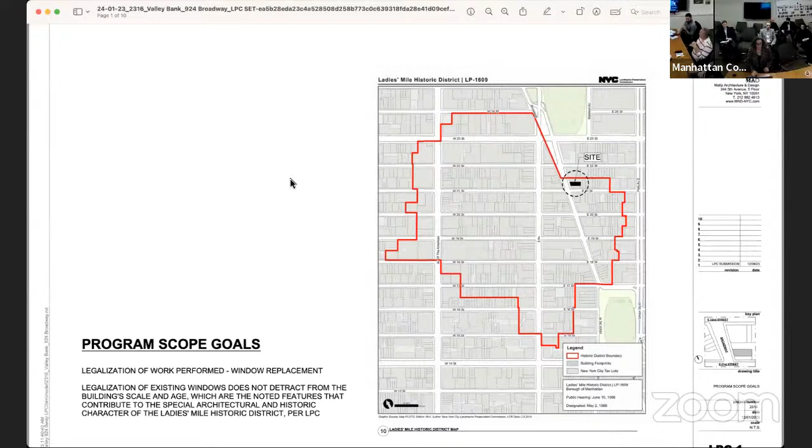Let me change my settings, apologize. Okay, I think that's it.

So my name is Hilda Cohen, I am from Matiz Architecture and Design, and we are presenting the legalization of the existing window replacement at 924 Broadway. 924 Broadway is within the Ladies' Mile Historic District. It's on the very edge, the upper section on the east side of Broadway between 21st and 22nd Street. And the legalization of the existing windows that are currently in place does not detract from the building's scale and age, which are the noted features that contribute to the special architectural and historic character of the Ladies' Mile Historic District per LPC.

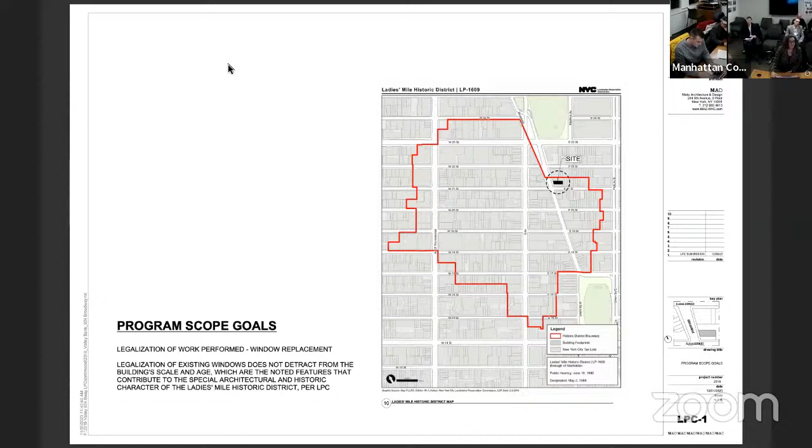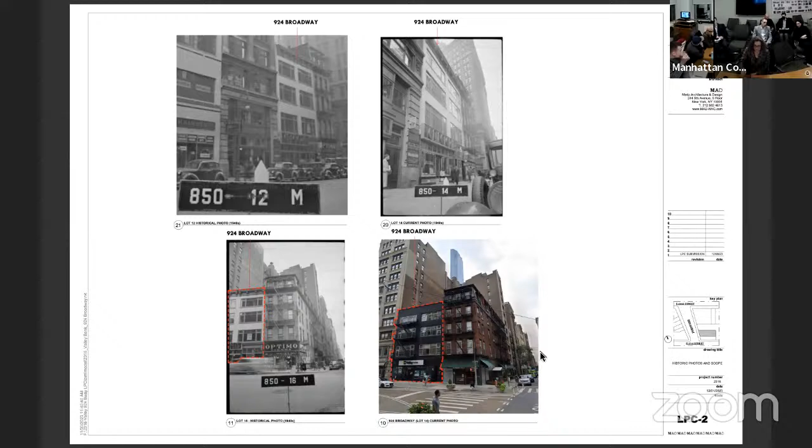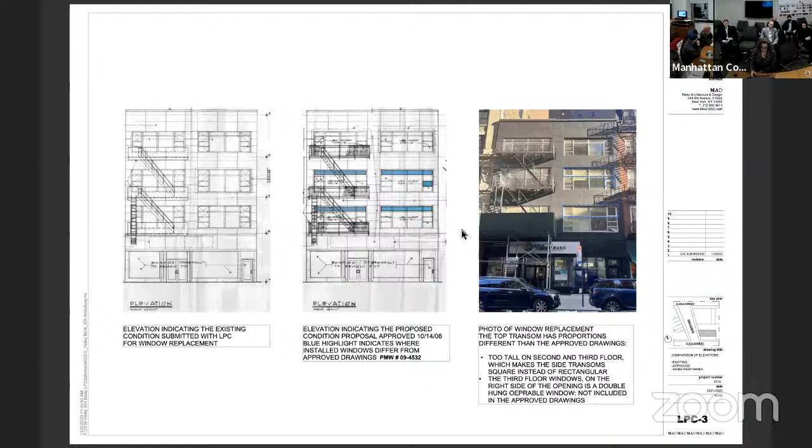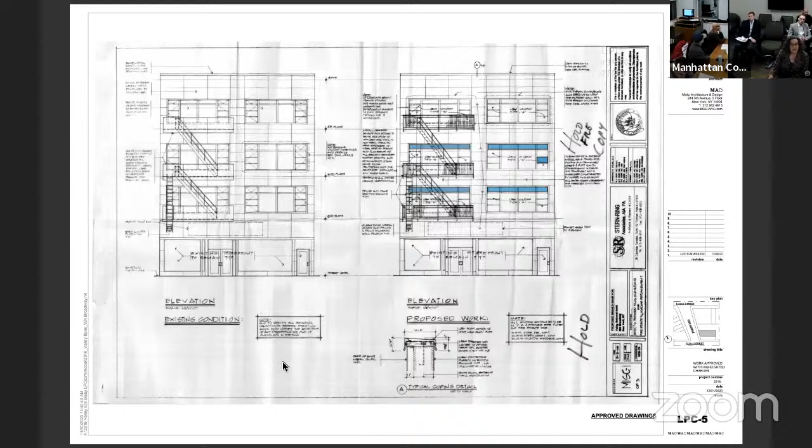One more time, this was from the original drawings that LPC approved. They wanted to see these as part of the presentation. This has not been modified as it was previously.

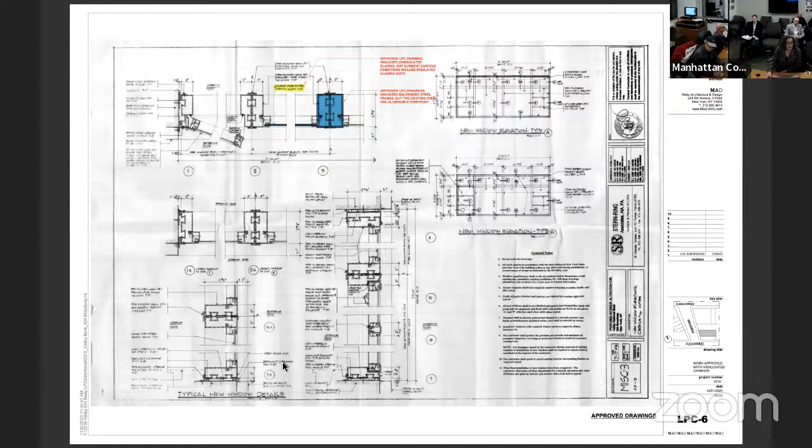This also shows the scope of work that was approved, and it does differ in the sense that what this shows was a single pane galvanized steel frame, which is not what was installed. What was installed is aluminum frame with insulated glazing, and it meets the energy efficient standards of the time that it was installed.

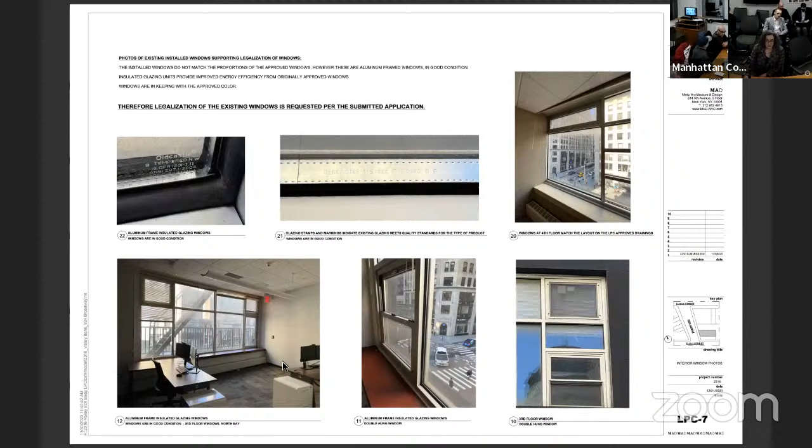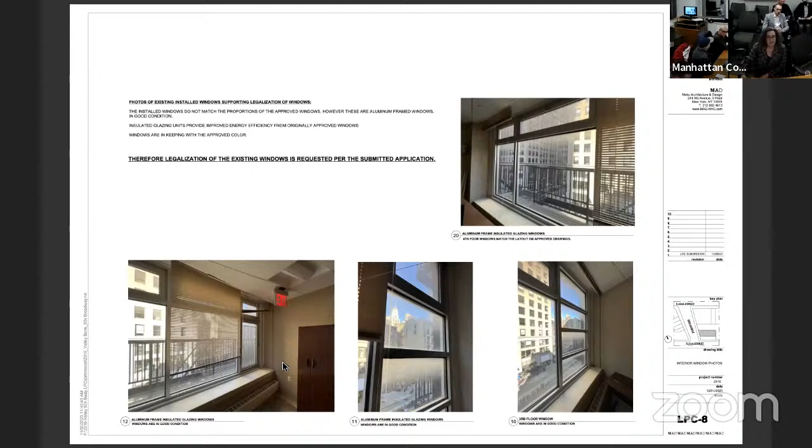And these windows are in good condition, and the proportions are slightly different, and that's what we're trying to legalize. So our request is to have you approve the legalization, and if you have any questions, we're open to that.

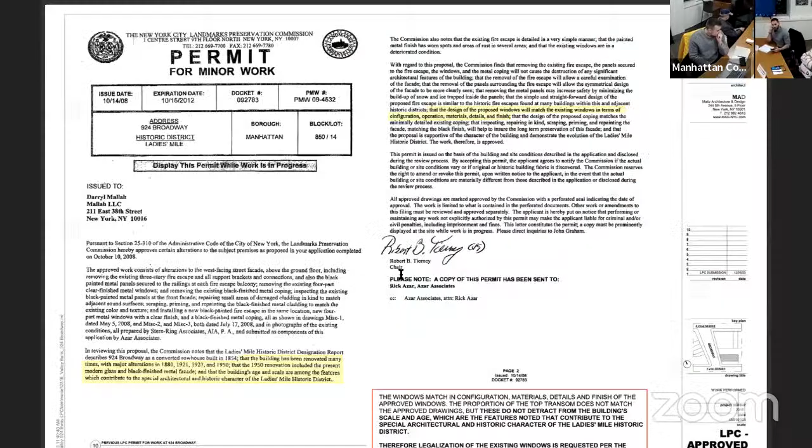Sorry, my computer just... Okay, so the original were actually metal framed. Here it has the removal was of metal framed. So we're assuming it was painted metal or it was aluminum. And then the approved drawings actually had galvanized metal with a single pane, which was one of the reasons that we wanted to make the assessment.

But what actually was installed was aluminum. Okay. And so LPC has said that they don't have an issue with the aluminum windows. They don't have an issue with the material. They don't have an issue with the insulated glazing. It's the specific top transom.

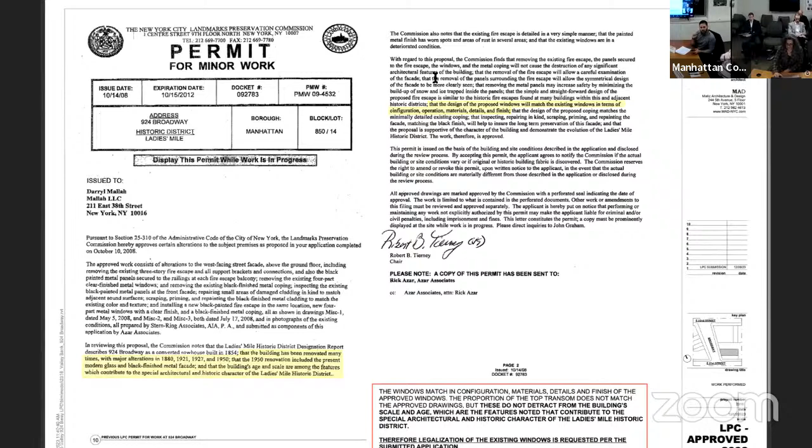Okay, just one quick thing. You mentioned a double hung window, one or maybe more. That's existing currently? That is existing, yeah. Okay, sorry, thank you.

When it was replaced, is there any condition where you have steel and aluminum in contact or near each other, or is it fully aluminum? It's a fully aluminum window system. It was removed and replaced as an entire unit, so the entire masonry opening and window were replaced. Thereby, if the transom wanted to be modified, it would be the entire window that would be modified.

What is the cost difference between galvanized steel and aluminum? I would imagine galvanized steel would be more expensive. By what magnitude, in 2008 numbers? Is it 50% more? 100%? Twice as much? It's pretty expensive, and it's difficult because there aren't as many fabricators that make galvanized steel. I think they must have been trying to meet a metal frame requirement. In discussions with LPC, the actual aluminum frame isn't the problem, it's just the proportions.

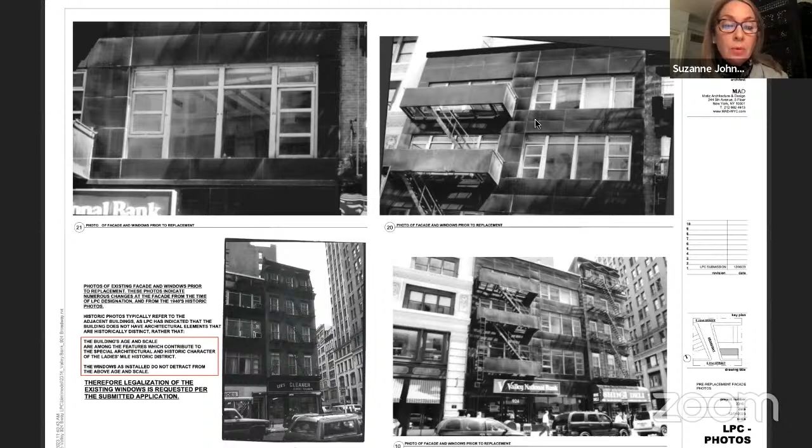Yes, we can. Fantastic. Okay, I just wanted to say I agree with what Tony had to say. I do wish they would do the whole building. I'm not sure if I would say nefarious, but I think this was probably a money issue, but more of it's just setting a precedence. And so I agree with everybody who's spoken so far. Thank you, Suzanne.

Yeah, I guess for me, not having an architectural background, when I look at the plan and I look at what it looks like in reality, it took me a while to figure out what was different. I needed the voiceover to be like, is it that different? It's pretty subtle to an untrained eye. I can see why, what the applicant is saying about the LPC thinking this building is not particularly special for the Ladies Mile Historic District, and that the windows on this particular building maybe aren't that big of a deal. I guess for me, intention is hard to speak to.

I'd probably fall more along the lines of what Brad said, where it's hard for me to say that there may or may not have been poor intent, but for the second one, it looks so similar to the plan to me that I don't have a problem with it.

Thank you, Peter. Coming from the other direction of Sashi, having an architectural background, being an architect, I'm guessing that maybe what happened was the owner of the building put in an application to change the windows, went to a window supplier, said yeah I can do that, here's the price. And then the window supplier maybe said I can save you a few dollars if we do this instead of this, and no one will ever notice. And it happened.

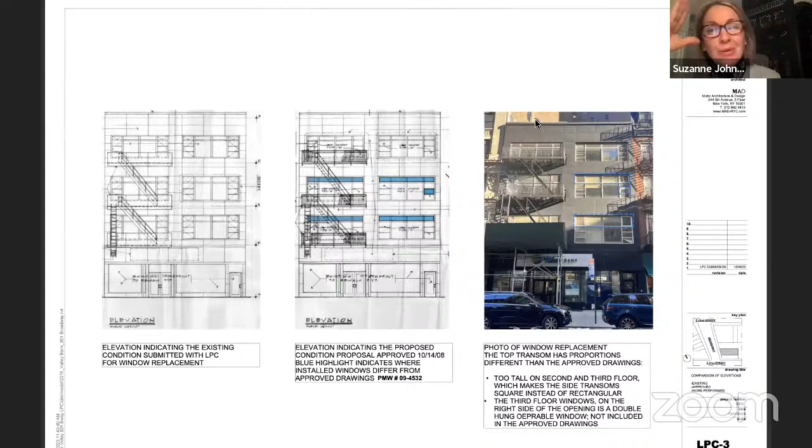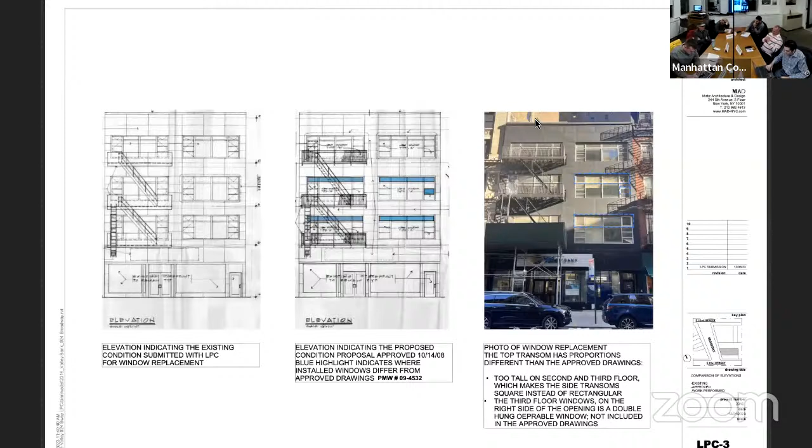Harris, yes. Hirschberg, no. Johnson? No would be the opposite - thank you, no. I'm a little... yes, no, I can hear things if there's a lot of talking. Yeah, no, I think no. Thank you, okay, back - yes. August, come back to me. Okay, Miller? Yes, I guess I'm a no. Ms. Vandorf? No. Stanberg? Yes. Takahashi Rao? Yes. Testa? No. Volkowitz? Yes. And I will be a yes. So motion passes.

Thank you very much, thank you all.

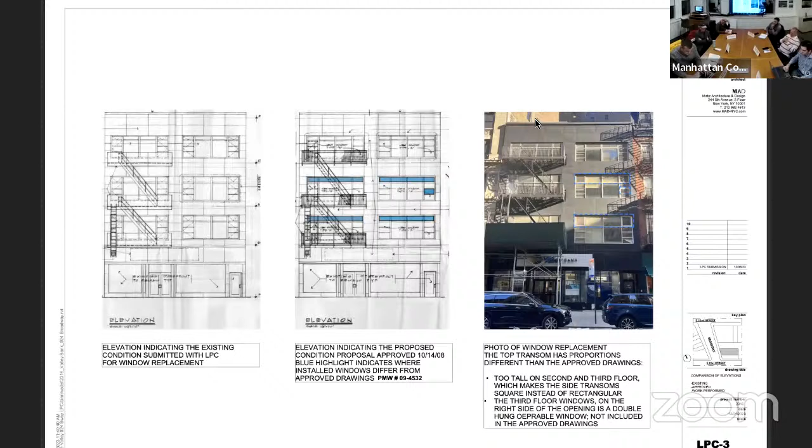Given how close the vote is, I would encourage you to attend the full board, in case this, as I said in my preamble, becomes the official position of the community board. So given how close the vote was and how conflicted I am, I'm not gonna lie, I encourage you to attend the full board meeting, because that may be an item that generates sort of lively discussion.

What we'll do is clarify some of those dates, go through some of the LPC communication that I have. Yes, if you have any further information you can share with us, I think that would be helpful in answering some of the questions the committee had. Great, thank you. It's February 8th. Thank you.

During public comment or - is that the first time that's happened, like a split vote? No, in my 18 years we've had some of that, not so often. But it's rare, very rare. Yeah, I haven't - I've seen it, it is very rare.

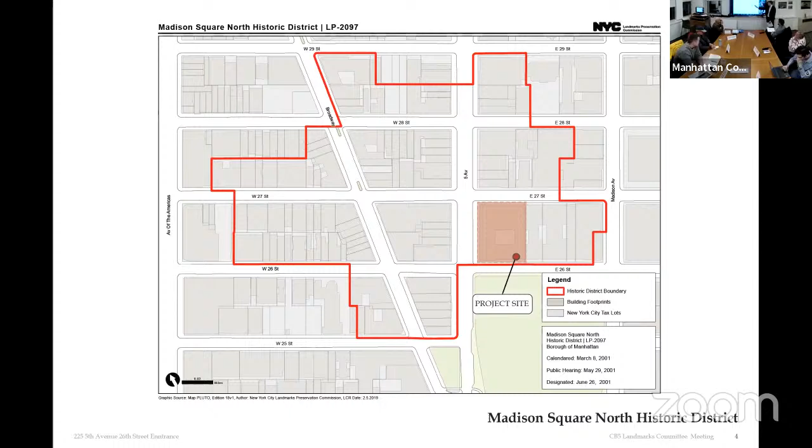And it's commercial in nature and it doesn't really match the use of the building, correct?

So we are proposing to remove the stairs that are on the outside of the building, remove the infill entrance, and remove the handrails that are currently on the building.

So we're pushing the stairs inside of the building. We're putting new doors and a transom in the opening.

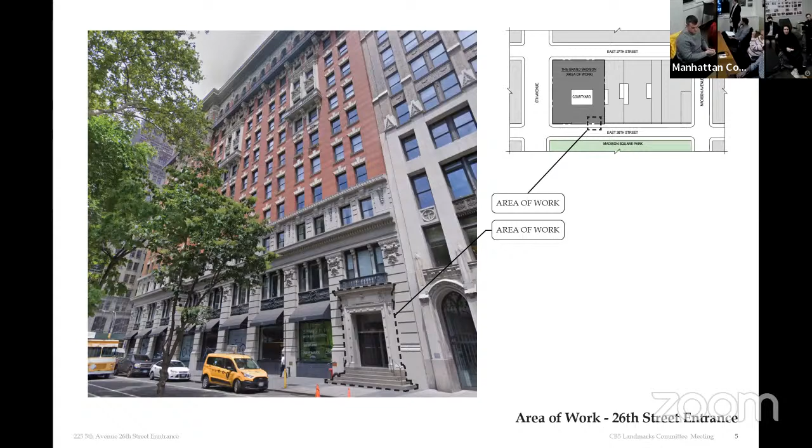Peter - could we look at the Fifth Avenue facade again to see how the sconces are laid out there? And are these original to the building, or were they installed at the time of the conversion? I should be careful with my words, but I know these sconces are not original to the building, but they may have been in an original location. But I don't have that - actually, we have the historic photo.

And do you have - there were different light fixtures, but they were not sconces. Okay, but they were at that location. But do you have a historic photo of 26th Street? The closest we have is this on the bottom. It really doesn't show enough detail - horse and carriages are in the way. Yes.

Was this building once the Brunswick Hotel? Yes, it was the Brunswick. And then it was a gift building? Correct. And then it was converted to condos? Yes.

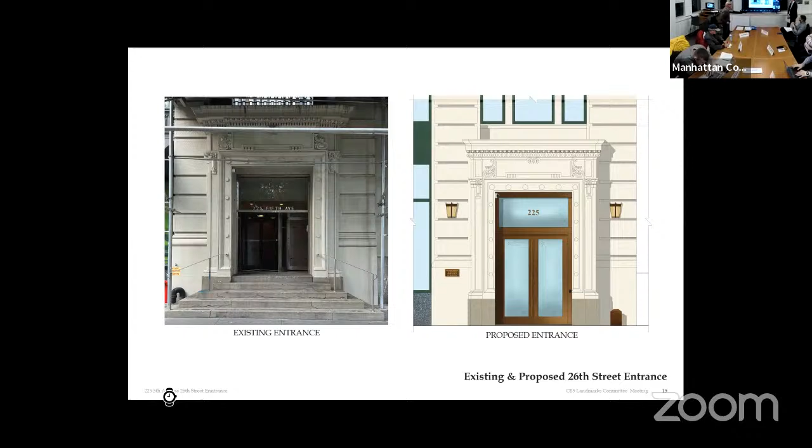Can you address the comment made by my colleague Zool on the intention, or alleged intention, for removal of the steps? I can tell you as an architect, I'm here to make the building look nicer and present well to the residents. Residents don't use this entry for a number of reasons. It's not safe. There is a recess in the building where people can hide. It's not a safe entry and people just do not use the entrance. So for safety concerns, there are a lot of reasons why we're proposing this.

Okay, thank you. So it is a doorman building. Is the doorman located there or at another entrance? No, they're on the other side, the doorman is at the other entrance.

Just so I understand, is the glass going to be frosted? It is not, the lower glass will be clear, and the upper glass will be frosted. Thank you. All right, any other questions?

Okay, so let's open up to members of the public. We still have no attendees on Zoom. Do we have any members of the public in attendance with us tonight who wish to speak to this application? Okay, seeing none, let's move to business session comments.

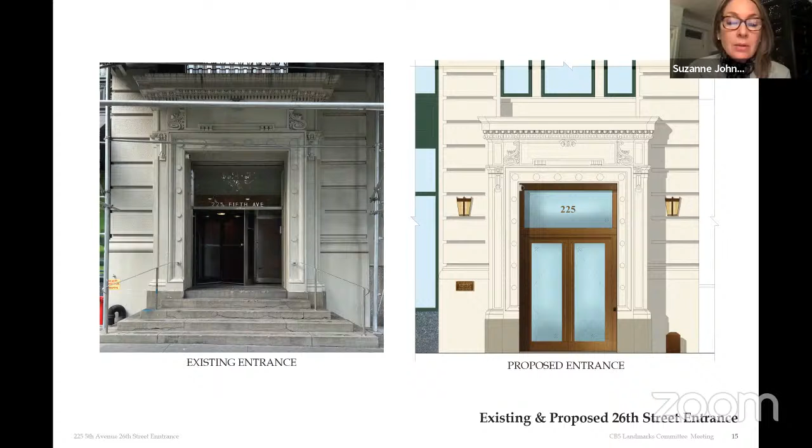So I will make a comment on that—oh sorry, Suzanne, you have your hand up, go ahead. Oh thanks, so I am in agreement with Tony and Brad. I will say very quickly that I agree about the lanterns and about the 225 Fifth Avenue typeface, but barring that, historically, I think it is a nice improvement, and we've certainly approved things in this manner with which we are advocating safety, quality, and landmarks. So I like this proposal. Okay, thank you.

So I'm actually torn with this one. It's always hard for me to approve any removal of original historic features. And although I totally appreciate that the stairs are not the original stairs—they've been rebuilt and reconstructed—nonetheless they built, then reconstructed, to what they used to be. So I really struggle with that.

I think that Zol's point is well taken. I wish the proposed entrance rendering would actually show the sidewalk. I really encourage the applicant to revise this so that at LPC, when you present to the commissioners, you actually show that. I think it will make an actually more compelling case that it is historically appropriate.

In the end, I will support this application, but I really want it known that we don't do it lightly to remove historic features and elements of the building, especially for a building of this significance. This is really the gateway to this particular historic district, and it is a very prominent building in and of itself. Actually, was it landmarked before that—no, we're actually not.

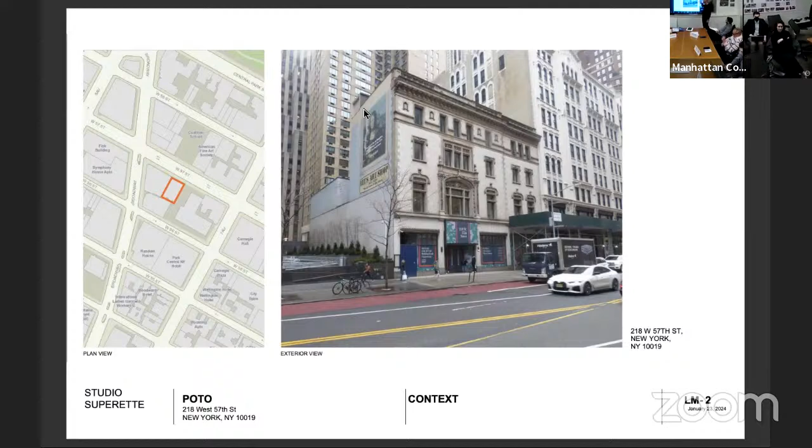Next slide: an overall axonometric, on the left the existing view, on the right the proposed. I'll highlight the areas of work. All the work is shown on this, but there's a certain scope of work that staff is going to approve—rooftop mechanicals, masonry repairs, things like that—noted here.

But the major elements before you and the commission were calendared, by the way, for a February 13th public hearing—I forgot to mention that at the outset. One is increasing the height of the elevator bulkhead by 12 feet to allow access onto this roof.

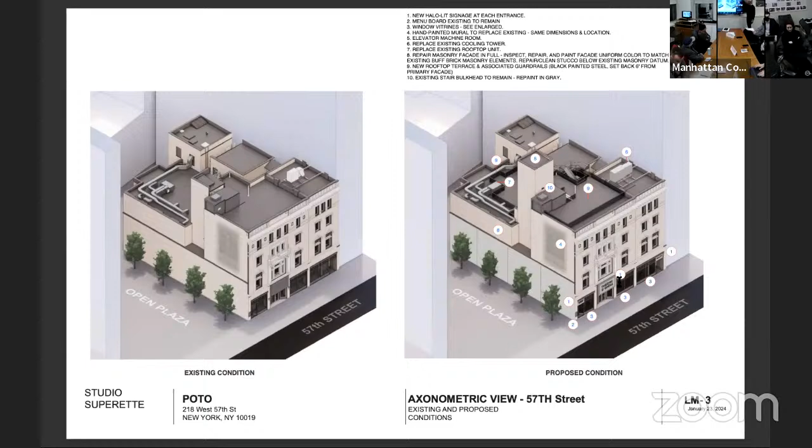We're retaining the existing stair bulkhead. There's a new stair in the back that's not part of the commission review, but basically the elevator bulkhead, the railings on this high roof, the railing on the low roof, reactivating a painted wall sign that exists on the side elevation—that's also part of the scope. And then at the ground plane, introducing new signage and treatments in the storefront windows, which I'll get into in greater detail in just a moment, so you get a sense of the overall scope.

From the front to the side, this building has visibility from 56th Street because that plaza runs through the block from 57th to 56th Street. So that view is actually in this direction, but you can see the elevator overrun here, extending up with access onto the roof. The stairs, the new stair off the back of the high roof down to the low roof, and then miscellaneous mechanical work on both levels that the staff will be reviewing.

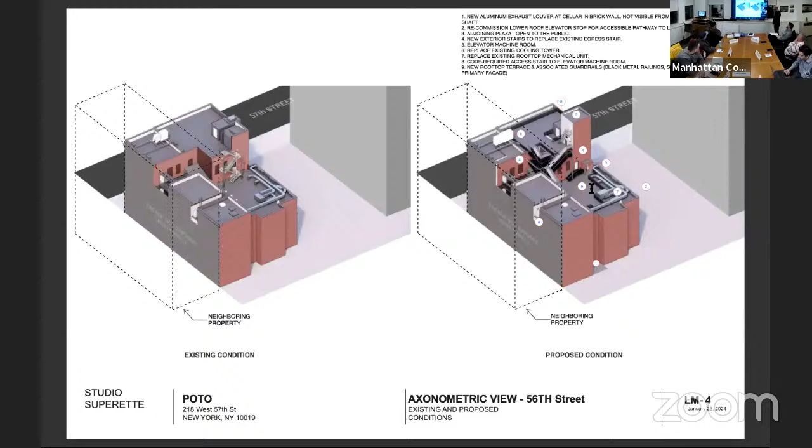The building has a really interesting history of adaptive reuse. It's quite a remarkable range of uses that this building had. It was built originally in its original form, just this 3-bay wide structure, completed in 1897 and designed by Cyrus Eidlitz as a society house for the American Society of Civil Engineers. And it was so popular that they expanded it into this bay about 10 years later.

But by the 1920s, they had actually moved out. And the building was used by the Ajax Rubber Company because this, as you probably all know, was part of Automobile Row. So the Society House moved out and it became a tire showroom, and then after that a car showroom, and then after that it became a Schrafft's.

So the base of the building was redone, obviously for commercial use, and then it was redone again. So the infill, this very grand marquee, was installed when Schrafft's came in. Schrafft's occupied the lower 2 floors, and the designation report actually notes that the upper floors were used for apartments. It's amazing how many different uses this building has taken on.

After Schrafft's moved out, I think in the 1970s, Lee's Art Shop came in. They originally had the lower floors. Eventually they took the whole building, and they made modifications to the ground floor.

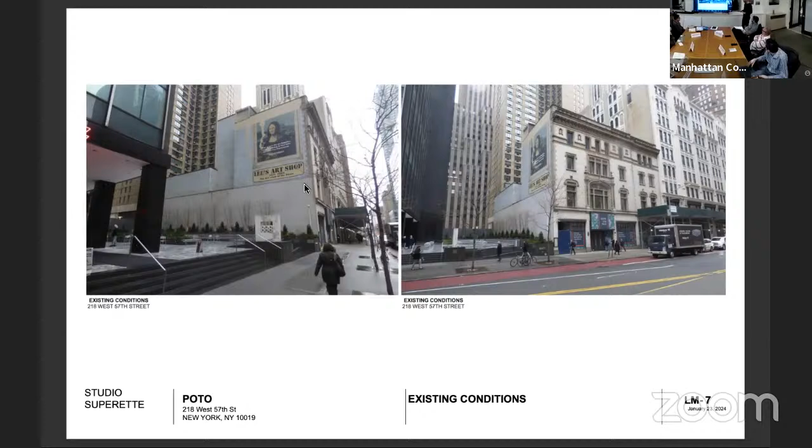We intend to use it for basically associated signage for the production that will happen. It's not going to be advertising. It's exclusively geared toward the production in the building.

This is looking east on 57th Street. And so we're going to be putting a railing in about 6 feet inboard of that, which will peek up over the parapet.

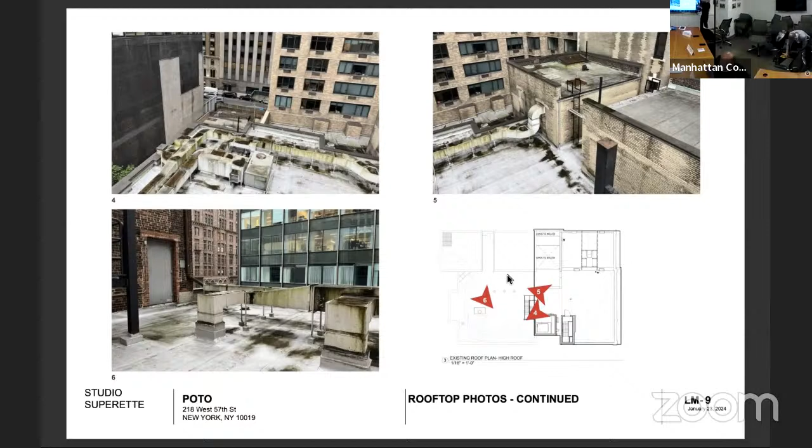This was the extension that was constructed about 10 years after the original construction. The production is going to actually occupy the insides of these, but also there'll be a way for the audience and the actors to occupy this low roof. We'll see more of that in just a minute, but this is this sort of tucked-in space that can be activated for the theatrical use.

An existing elevation on the left and a proposed elevation on the right. So you see the increase in height of the elevator bulkhead here, about 12.5 feet in increase. That bulkhead is set back almost 40 feet from the front of the building, so it is not visible from directly across the street or from the west.

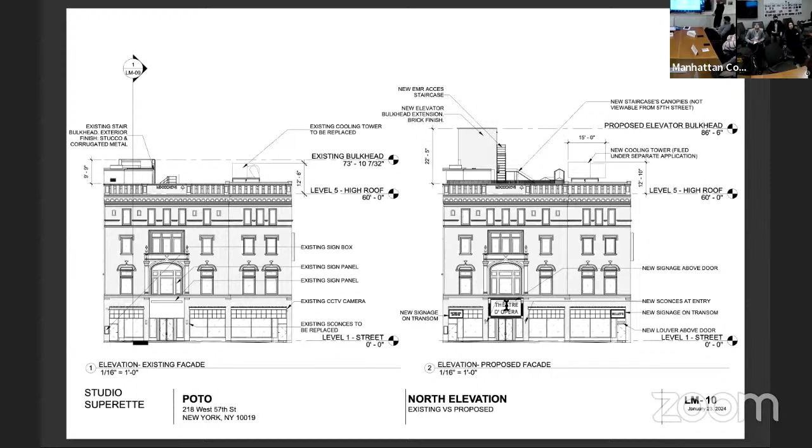We have some parameters and criteria for the wall sign. It will be basically the same size as the existing one. It'll be hand painted, not a vinyl stretch banner. It'll be painted and tied directly to the actual performance itself.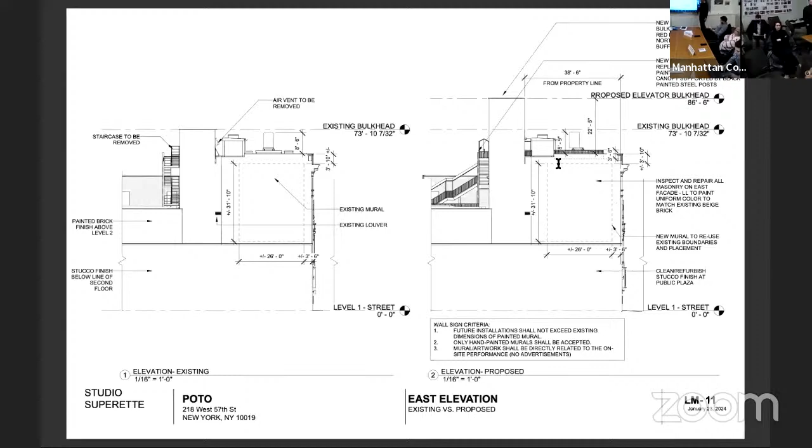And then you can see, inside the elevation, the stair bulkhead and the increased height in the elevator bulkhead. Next slide, a section. There's a little bit of information here, both an existing section and a proposed section. We have to basically extend the existing elevator because it runs through the entire building. It's really not feasible to put in a new elevator.

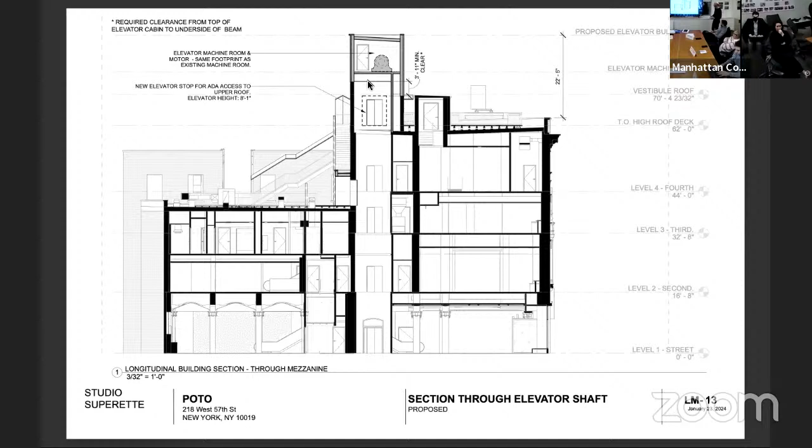So the next slide illustrates how that's going to happen. All the mechanics that operate the elevator have to be lifted up. That's what requires an increased height, and there has to be a nearly four-foot clear space above the cab to the underside where the mechanicals are. That's what results in the twelve and a half foot increase in height of the bulkhead.

A little bit about how the roofscape is going to be used. On this upper roof, during the performances, the actors will be basically in this zone and the audience will be up here, and they'll move through the building to the different parts, including the high roof and the low roof.

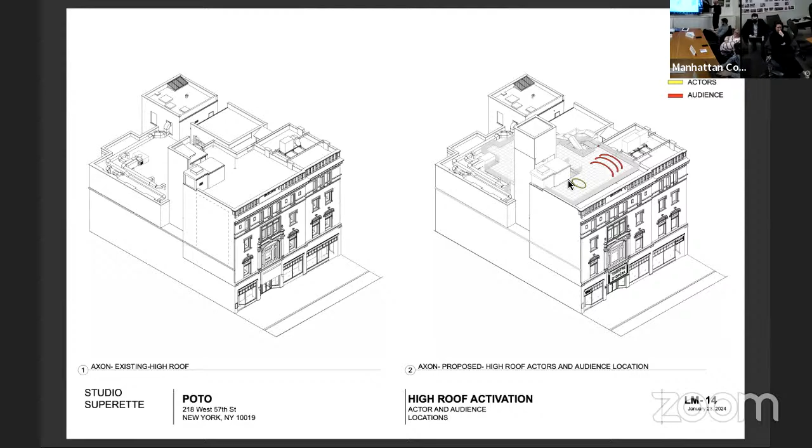Next slide. In plan, there'll be a new roof deck built, with a railing around it. You can see how the circulation will work: here's the elevator letting out into this little vestibule and then out onto the roof, or the stair bringing people right up onto the roof. This stair brings people down off the roof.

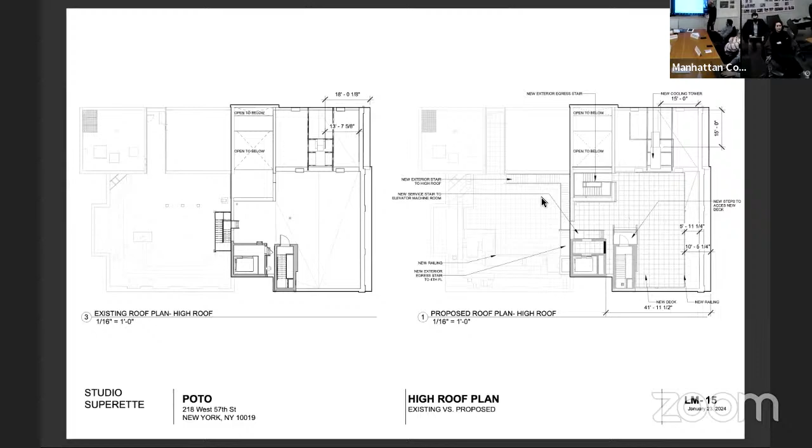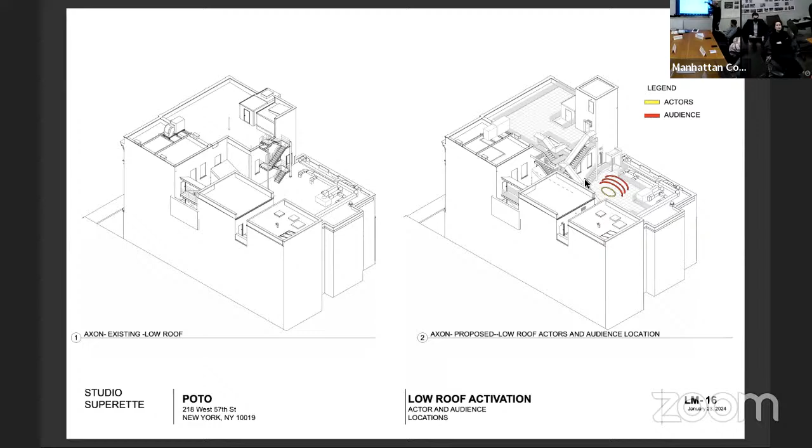Next slide. On the low roof, similarly, tucked into that corner, the actors will be in this zone and the audience will be behind them. There'll be a low railing around here, basically separating the performance space from the mechanical equipment that's up on the roof.

And then an existing and proposed plan, again with new roofing and decking here, mechanicals at the perimeter, railing inboard, and active space there in the corner.

This is going to change probably twenty times before the performance, which I think is scheduled for late this year or next year—following year, March 2025. So this is very preliminary, but you get the idea that it's going to be atmospheric, but low scale and theatrical in its set design.

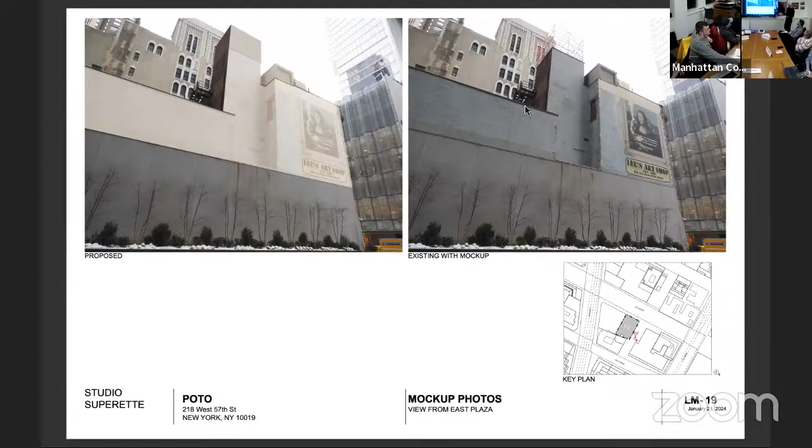Next slide. And then as you come around, walking through that plaza down onto the sidewalk, again it's visible. I think this is not a zero-sum game—like, if it's visible it's bad, if it's not visible it's good. It is visible, but I think what you have to consider is the impact on the building from this visibility.

You never see the extension in conjunction with this really beautiful front facade, this carved limestone. You just see it over this 1970s plaza. I think that's a relevant factor to consider in terms of its appropriateness.

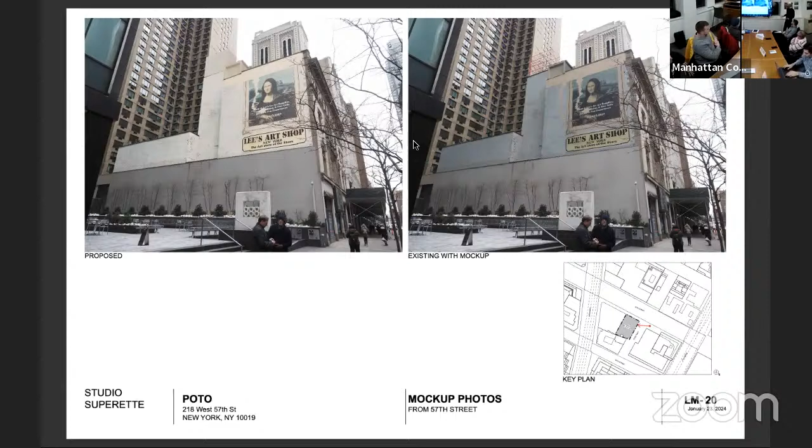As you move down 57th Street, looking southwest, you see it with the Argonaut beyond, but it's in the context of something much larger behind it, and I think it really doesn't detract from the overall meaning of the historic facade.

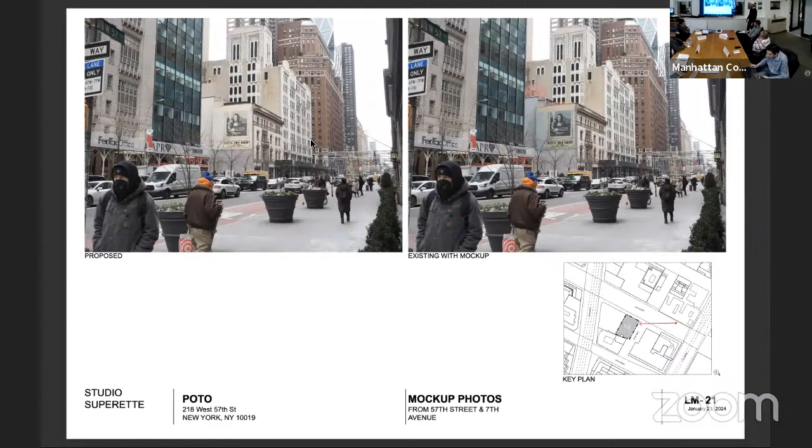The furthest you can get back is from the east side on 7th Avenue, this angled view of the Osborne. You can see the mock-up here and the bulkhead there, a little bit of railing picking up over the parapet. This will just be a simple 4-inch on center metal picket railing.

Coming back around, this is a little bit closer. Again, you can see it sort of through that east elevation.

This next one, sorry, we're on 56th Street now. This plaza runs all the way through from 56th to 57th Street, so this is the 56th Street side. They're doing some construction, I think there may be local law work on this side elevation, so it's closed off right now. But you can see the back of the building.

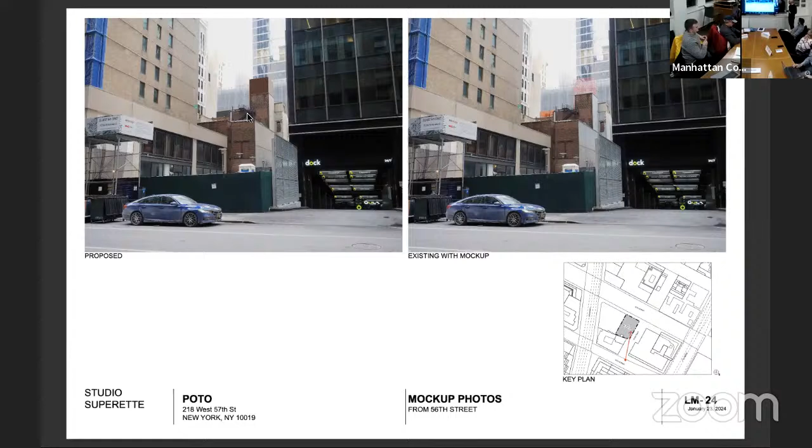This is the red brick of the existing elevator bulkhead, so the idea is that it'll be constructed in red brick, and that brick will continue up. But on the east side, the plaza side, and the north side where it's a different color, it'll be finished in a lighter color to blend with what's directly below it.

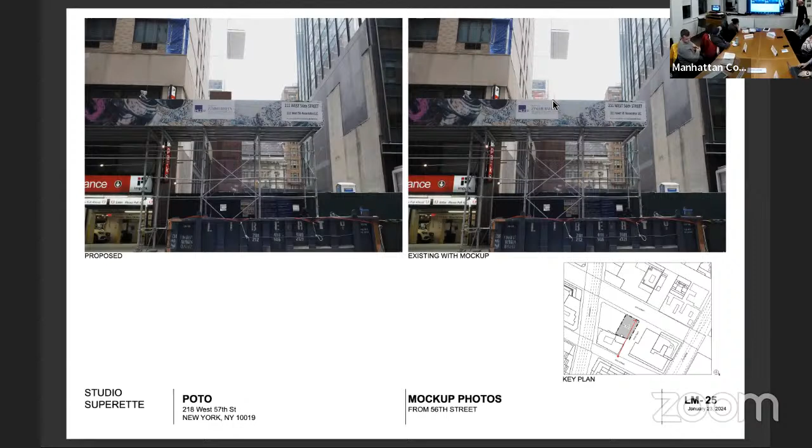We added this, it's a little hard to read, very washed out on the street, but basically there's a moment here where you can see it partially against the sky adjacent to the tower that's over the Art Students League. So there's a vantage point from there.

These images are really just to illustrate where you can't see it. We don't typically include these, but I do think it's relevant that when you're standing directly across from the building, you can't see anything up on the roof.

Or as you move to the west, as far as the west side of Broadway. If you stand at the entrance to Nordstrom, about 10 feet inboard of the property line, you can see a little of the bulkhead, but the way Landmarks guides applicants on this is views from the public way. If you're standing in front of the Nordstrom's entrance, you're not in the public way, you're on Nordstrom's property. Same for the entrance to the apartment building. So there's a little bit of visibility when you're on somebody else's property. You can go into Nordstrom's and the whole front facade is glass, and you probably see a little bit more, but that's not how Landmarks evaluates these things.

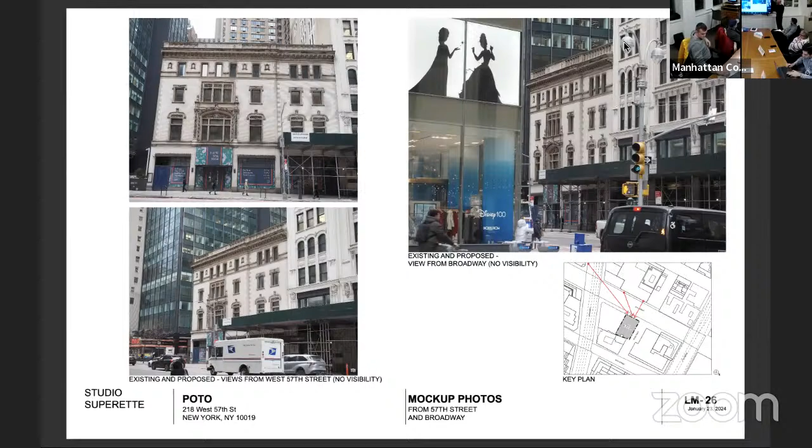Turning to the ground floor, this is an overall view of the base of the building. As I mentioned, all the storefronts, as you saw in those historic photographs, were reconstructed. The base of the building was reconstructed in about 1918. The storefronts that are there today date to 2002, just a metal and glass and granite infill.

This is where the Lee's Art Shop sign is, but there's a panel sign right now over that. And here, these are recessed entries both on the far east and far west sides of the storefront. For the most part, we're going to maintain all the infill as it is, but just introduce signage and improve the lighting and clean things up a bit.

We're proposing 4 or 5 vitrines in the storefront windows with curtains, and you'll see this in the elevation and the renderings of how this will work. The idea is that these little vitrines are going to hold models and little elements related to the production, and they'll change over time.

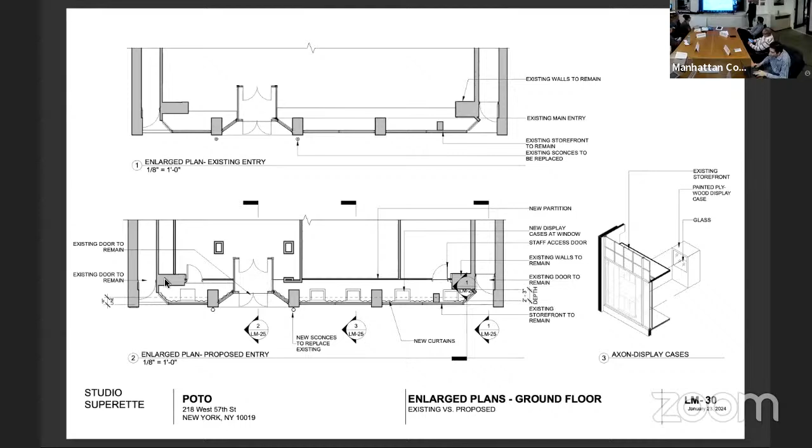The main entry will have this panel sign. This is basically going to be a framed sign with black painted metal. These are going to be halo lit letters, so they'll have halo lighting, with illumination from behind, not face lit.

This is going to sit in front of that existing Lee's Art Shop sign, so that's really right at the main entry. The letters are called out at 18 inches, and we're proposing 2 new sconces in place of the non-historic sconces that are there today.

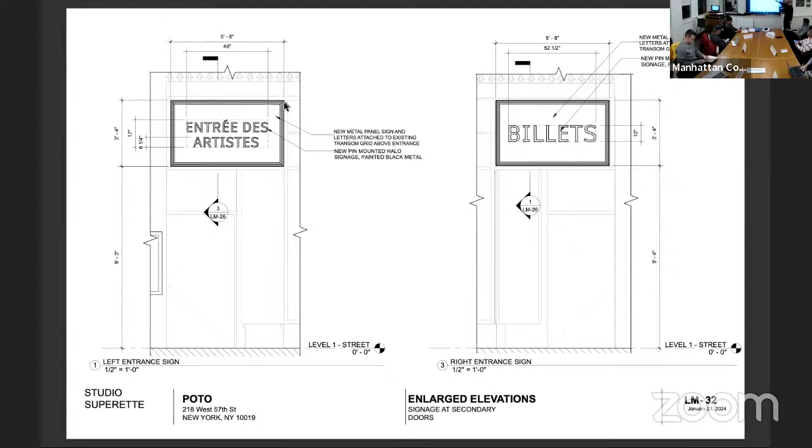Next slide. The 2 outermost bays will also get simple panel signs. Again, these are just a metal panel with 10-inch and 6 1/4 inch halo letters, which will be on the outer bays of the ground floor.

Sections, again, this is just illustrating the vitrines that will be at the storefront windows, and then the signage and the typical storefront windows in section.

Some details on the signage. We can come back to this if you'd like.

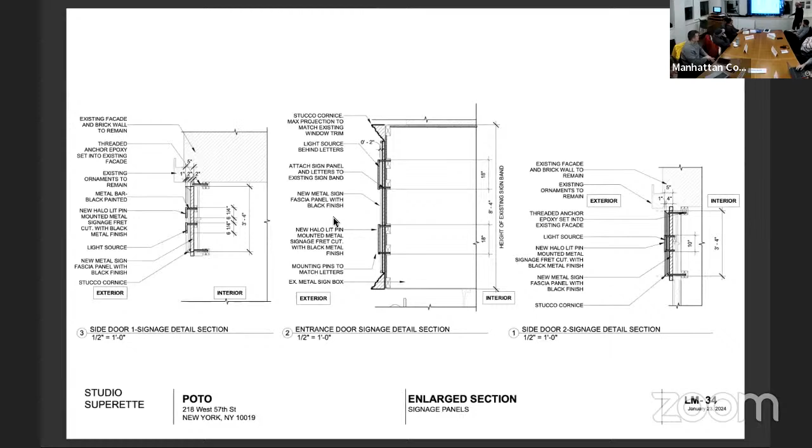So I think one thing, we're excited about the building taking on yet another new use. As I mentioned about the elevator bulkhead, yes, you can see it, but it allows for the full activation of the building, and I don't think it really detracts from the building's architectural character, which I think ultimately is the consideration for appropriateness that we like to think about.

So happy to take any questions that you all may have. Thank you. All right, questions? Brad? I have a few, if that's all right.

Yes. So just to clarify the question, the bulkhead, when you say it's matching the material directly below it? Right, so the finish of it will, this is a little bit lighter, but it probably would have faded out in the dark. So it's going to have the same finish on this east face and the north face of what's directly below it. Yeah, and the south face as well.

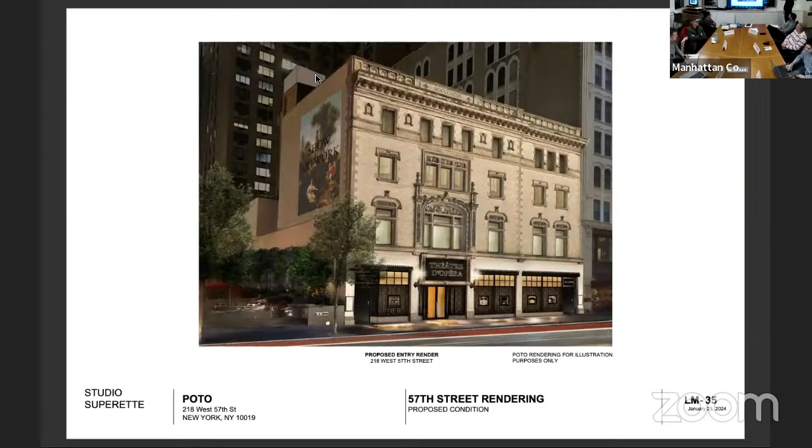Yeah, the railing on the roof. What is the finish and or color of that? Black, it's just a very simple metal railing.

The scenery that you're planning on putting on the roof, I assume that probably doesn't come back to us. That's probably considered in the same category as like furniture.

Right, so the idea is A, that it's low slung and not visible, and B, that it's going to change frequently. Some of it's going to come and go on a daily basis. We've talked together as a team, and the production company understands that if they decide, a year and a half out, that they want something bigger, they're going to have to go back through this process. It's just too early for them to say exactly what they want. So we try to anticipate as much as we can to minimize the number of trips through the process, but that would be unavoidable.

Yeah, but I guess I would be more concerned about the lighting aspect.

Can you talk a little more about the egress from particularly that lower roof? How is that accomplished? If you want to go to the plan. So there's egress through these stairs, which allows people to get up and down from this upper roof. And then there's egress into here off of this roof down to that stair. I think those are our two means, correct? Yeah, that's correct. So the two paths of egress are: one through that mechanical bulkhead, which has an existing stair in it, and the other via a new stair we're building on the east side, going up those stairs and then into the building and down the existing stair that's there. Okay, so both means of egress are interior to the building.

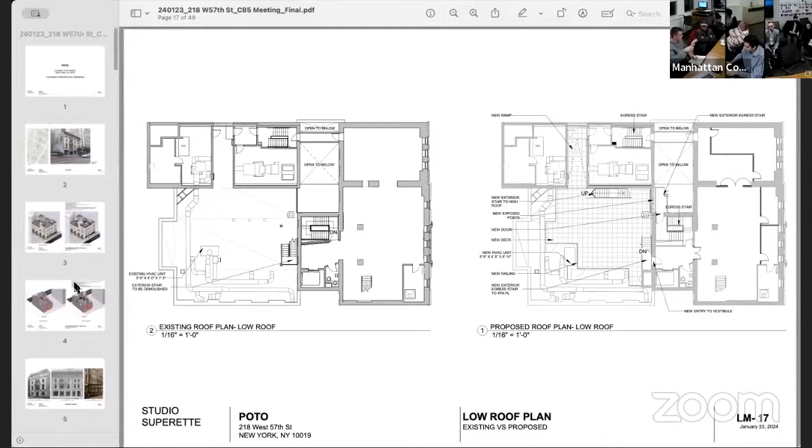And then what other one requires you to go kind of up a little, like half level and then back down? Yeah. So the two new stairs I thought I saw on the roof, are they entirely just communicating stairs between the upper and lower roof? One of the new stairs is a means of egress from the upper roof, and the other stair is a communicating stair between the lower and upper roof.

So the other thing is, those are the stairs, the communicating stairs. I think also this elevator, historically there's an opening there that we are reopening. So there's obviously accessible access to this low roof as well from the same shaft, the existing elevator. Which is not your question, but it's part of the circulation.

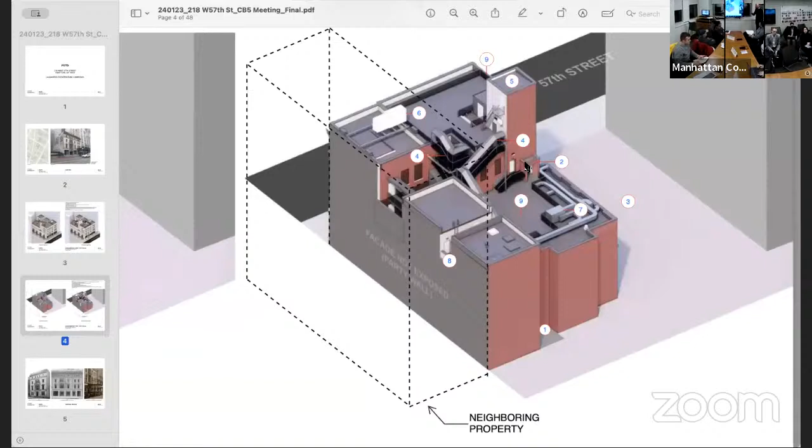Appreciate it, thank you. Moving down to the lower level of the storefront, the vitrines you're mentioning are basically furniture pieces that sit right up against the glass. That's why they're part of our purview. They're not actually penetrating or making any modifications to the storefront; it's the proximity to the glass that requires commission review.

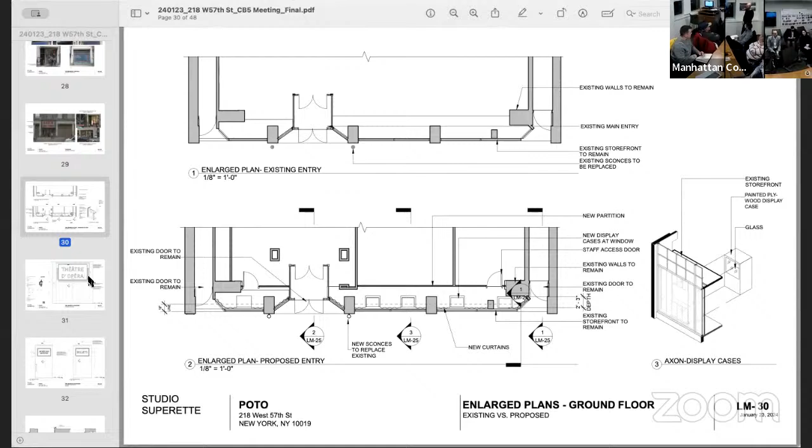Okay, and then the signage and lighting you're proposing, particularly the new signage and new lighting. Is that penetrating historic fabric? No, this sign is basically going to sit in front of where the Lee's Art Shop sign was, and the other signs are just going to be attached to that sort of muntin grid from the 2002 storefront in the building.

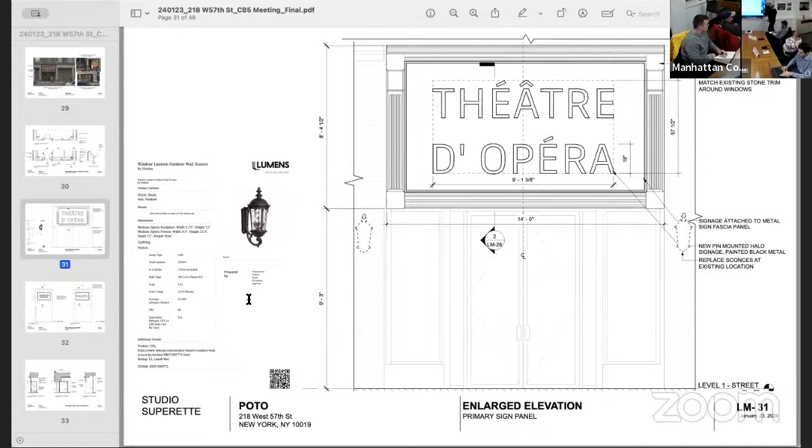Okay, and then the lighting? So the lighting, maybe we can go back to slide 28 or the one before it. The lighting is basically going to go in place of these existing fixtures, which are strangely undersized and I don't even know if they still work, so they'll go in that location.

Thank you, I actually have a follow-up to Brad's questions. How are these fixtures going to be attached? Through the masonry. And are you going to try to reuse the existing punctures from the existing fixtures? I think the elevation would allow for that. I don't know if you guys know, is it the same location for the sconces? Yeah, same location. But what about the attachments? Are you basically going to remove and then have the same holes — four holes that you're going to patch, and then make an additional four holes for the new fixture? That would be the plan. There was an escutcheon plate on the back of the fixture, so we haven't pulled it off to see where the actual penetrations are, but there is an escutcheon plate behind the fixture and we would keep the same footprint of that escutcheon plate on the lines.

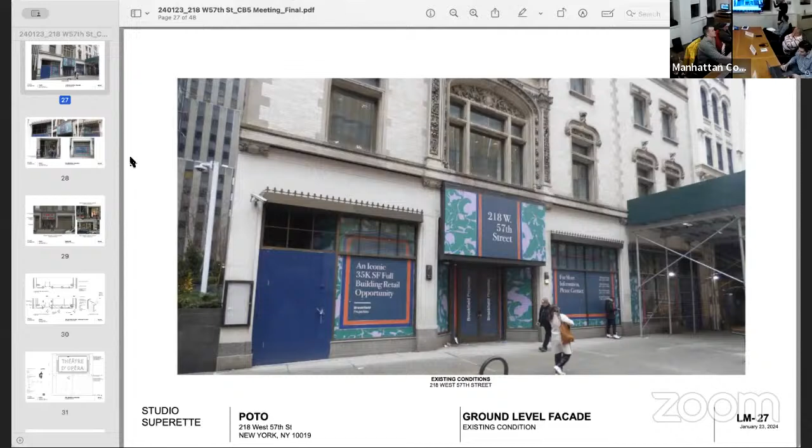Okay, the other thing I'll point out — if you can go to slide 27 — the base of this building is all painted, and you can sort of pick out a little bit. This is not beautiful pristine stone; it's been coated and smeared and painted. So it's not exposed masonry that's in great shape, and it will remain painted just because of the condition it's in. So what is the material, is it limestone? I think it's a combination of limestone and stucco because the base has been changed so many times that there are little bits and pieces you can read through the paint. It's not a clean stone edge, so it's been sort of worked over. Oh yeah, I see, okay, got it.

I have more questions, but I'll get back to them later. Suzanne, you have your hand up, go ahead.

So, wow, that's a lot of changes to a historic building that's a real gem in this neighborhood. I think it does matter. You mentioned it's just the impact on the building, but this is next to the Rodin building, the Osborne, Carnegie Hall, the Argonaut building. So I think it actually does matter to the neighborhood.

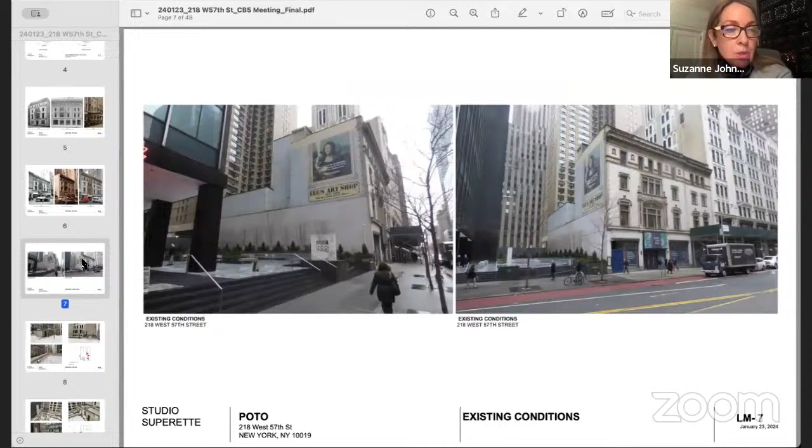Can I just ask you first about the public plaza that you're going to be building on this addition? Can you just verify for me, that was a public plaza, it used to be an open public space. Is that something you guys can build on, I guess? Now I'm talking behind where you're adding this addition.

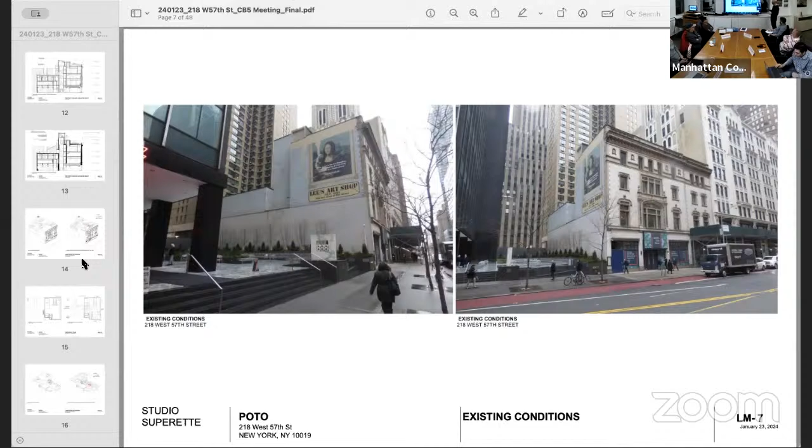Yeah, I think you maybe misunderstood our proposal. We are not touching the plaza. The only work is up on the roof and then at the base of the building. So you're not adding an addition to the back of this building? No, there's no addition. All we're doing at the roof is extending the elevator and extruding the existing elevator shaft.

Let's make sure everybody understands the scope of work. I'm sorry that I'm confused, it was just a lot of information. So if you'll bear with my question.

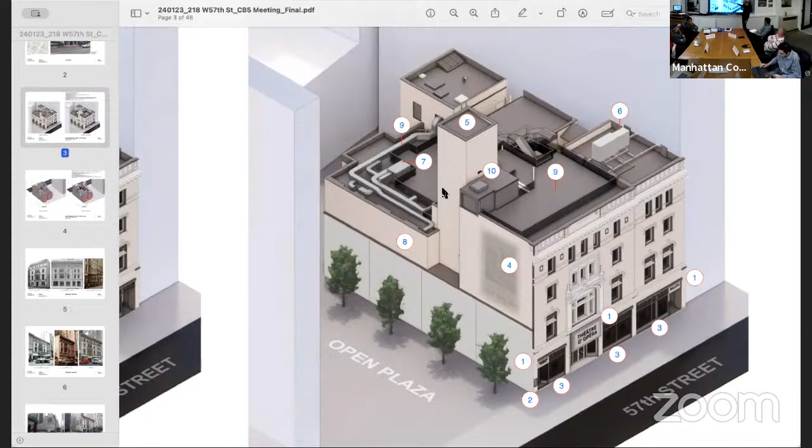Yeah, sure. So there's replacement of mechanical equipment on the roof. There's extruding the existing elevator shaft, basically one stop more to allow people to get onto this upper roof. We're putting a railing on the roof because right now the roof, particularly this edge, is not code compliant. So we're adding a railing here and also at the lower roof, and then the connecting stair. That's the scope on the roof.

Okay, so that squared off area there, that's not in the public—you were speaking about the street behind it, you were talking about a view from the street behind. So I guess I was a little confused as to where that was being placed.

Can I just ask you about the railing? So you said it's not compliant because I don't think they've ever done anything on the roof before. And I'm a huge Punchdrunk fan, and I love the McKittrick and Sleep No More.

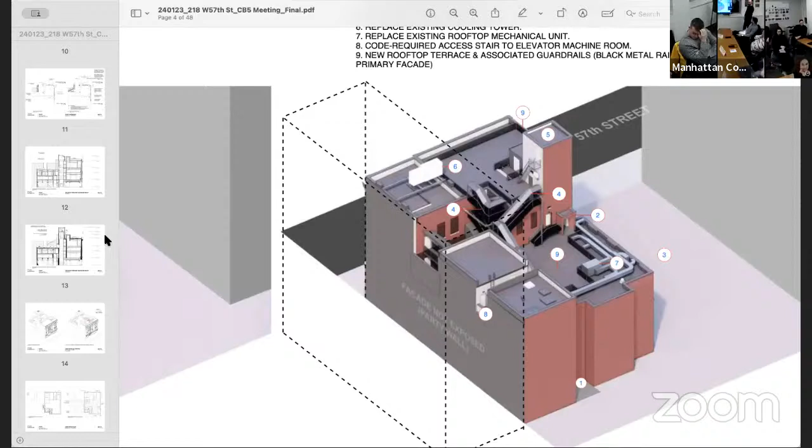How long is this contract in place for? Is it all these changes being made to this historic building, and how long is the contract for this particular show in place? Do you guys know? I don't know how long the lease is, but they intend to be there for a long time, though I'm not sure that's relevant to the appropriateness of the scope of work. Yeah, I just wondered, because it's a lot of changes—if it was a 6 month run, it would be a lot.

I just wanted to ask about the red brick. Can you speak a little bit more about that change—were you saying that you were building that in the red brick color that would match the facade? Can you talk a little bit about that?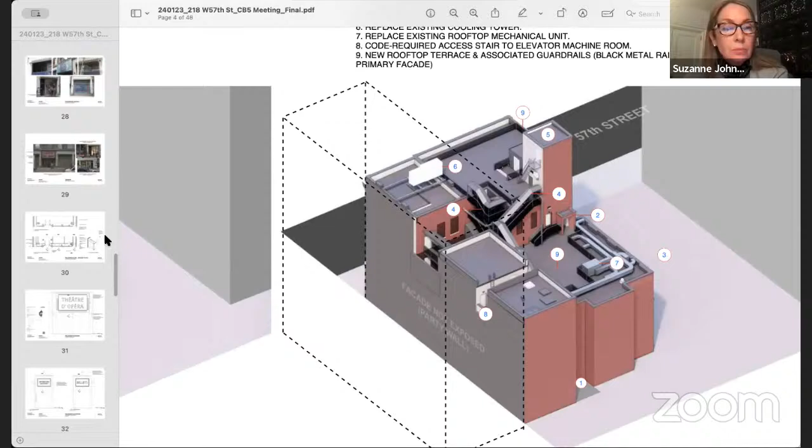Yeah, if you can go down to the existing photo from the back, the sight lines. So right now, this is the view from 56th Street, the back of that connecting plaza, that public plaza, where we are doing no work. The whole back of the building, all the secondary elevations, are constructed in red brick. The side elevation has been painted and parged. So the idea is that the extension will be built in red brick to match what's directly below.

So this will hopefully be more continuous in its appearance, with red brick above connecting with the red brick below. And then on the plaza elevation, it'll be finished in the same color as that side stucco wall.

Okay, and then just one last point with the arrow so that—because Suzanne is watching. Right. Yeah.

Can you go back to the previous slide and just highlight that? I don't know if Suzanne, are you able to see the arrow so that you can see what has changed?

I can. Okay, good, thank you. I couldn't before, and I live in this neighborhood, I walk by this all the time, so I'm sort of familiar now. I'll take a closer look, but I understand now.

Before it wasn't clear to me, but thank you. Can you see that railing, the one you're adding so the actors don't fall off? I work as an actor, no actor wants to fall to their death. So the railing's important, but will you be able to see it from the Osborne or from some of these residential buildings across the way, from an upper floor apartment?

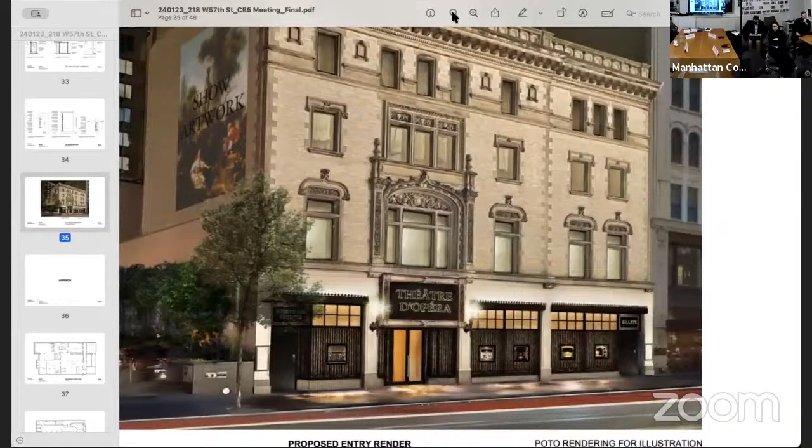Great, thank you. Other questions? Yes, Barbara. Can we look at the facade picture rendering with the vitrines? I just wanted to ask about that. I also pass this building every day on my way to work, so I'm thrilled it's going to be used again, it's a really special facade. I wanted to get a feel for how animated that facade will be to passersby. Is there any thought to making the vitrines larger?

I think the idea is that they're going to have small models which they will change out. So they'll be animated, but they won't be large scale, they'll be lit and animated, but not large.

Okay, can you give the explanation again, I may have been distracted. For the treatment at the, what is this black finish? There's no change to the finish, it's really just how the rendering is done, it's just dark. There's no change to the finish of the storefronts.

Basically, we're putting in curtains in the windows with a vitrine at the center. Got it, yeah. So the material is glass, the window, absolutely, and all this is happening on the inside. Nothing inside outside, there's the black curtains. Which, technically, Landmarks doesn't regulate window treatment, so that's not really part of it, but it's part of the way the windows are being treated, with the screen and.

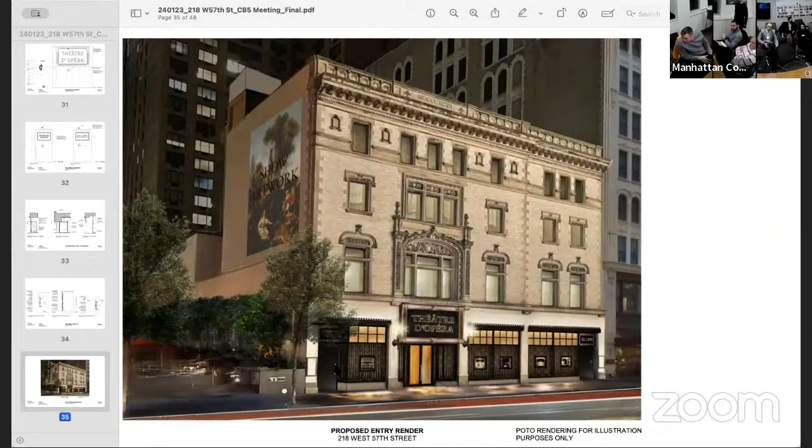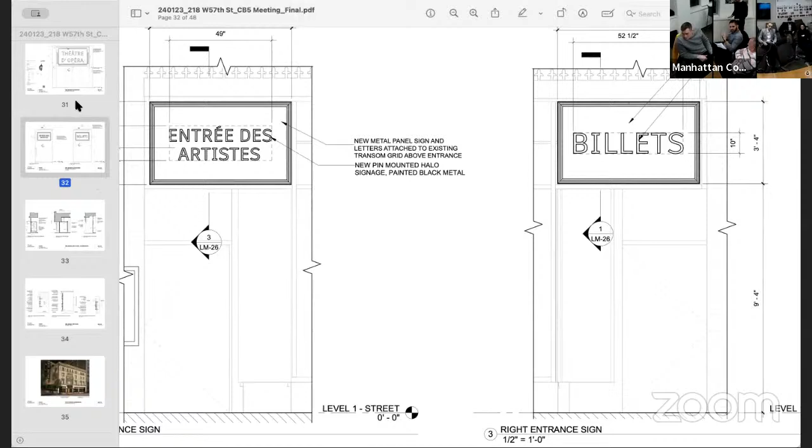Okay, about what those doors actually look like, are they solid? The doors are translucent right now with a vestibule behind them. The intention is to leave everything with the storefront in place. Okay, with the two front doors, is that clear glass? Like the side doors, no, they're currently like service entrances, they're opaque. They're hollow metal doors, opaque. The middle ones I thought you were referring to are glass storefront doors.

Okay, and then the two side ones are going to remain solid and opaque? Yeah, yeah. There's nothing else—only the vitrines, signage, and lights are the only things being proposed on this ground level.

Okay, Mike, I have two questions. First, on the plaza, is it forbidden for a building to be built there? I believe so, because that plaza was created when 888 Seventh was built—they got a bonus for area in creating the plaza, so it's going to remain. But it's a separate lot, it's like its own tax lot, purely, yeah. I understand.

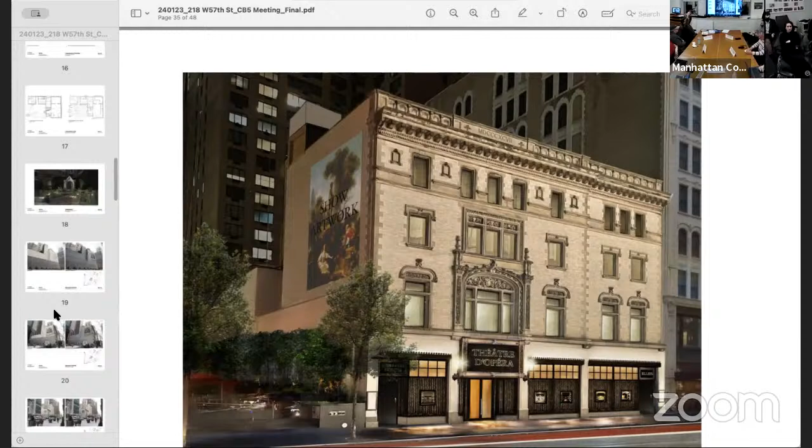And the other question I have: in inclement weather, there's going to be a show on the roof. Is there some kind of awning, tent, or structure that's going to appear in the wintertime or on a rainy day to shelter the performances that might be happening? Good question—this is something we're talking about right now. Likely the way this will be handled, there'll be some structure that goes up on a rainy day, and then at the end of the performance that evening, it comes down. So it's not a permanent or regulated element.

Think of it basically like an umbrella. It'll only cover this portion—where the audience is. The folks we've been speaking with on the performance side have said the actors don't mind getting wet, maybe they're holding umbrellas, but the audience will be covered with something very simple. It won't be enclosed, no, to keep them warm—the zoning regulations do not allow enclosure here, so it will certainly remain open.

Are we on comments? No, we're still in questions. Will there be any seating for the audience? No seating, they'll be standing on the roof. People will be accommodated, I think you have to have this, but the idea is that you're sort of moving through the building, and you're standing.

Okay, and typically how long would the audience be on the roof at any particular time? It's not dwelling on the roof—I'll remind you, per the zoning regulations, it's accessory to the performance. So in that accessory nature, it's not fundamental to the show that you're on the roof, and that's something we're working through with the theatrical team, how to make this proper. If you have to gauge a duration, is it like they come in, walk through, 5 minutes on the roof and 5 more? 10, not more. Okay.

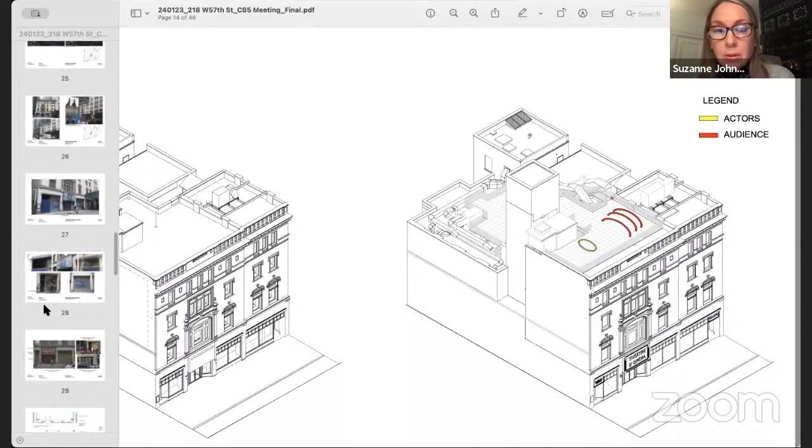Thank you, sorry, it's a little hard—sometimes I can't hear the answers. So I hope I'm not being redundant, but I wanted to understand the facade where the signage is—they are illuminated, correct? So they're halo lit, which means it's a solid metal letter with a light source behind it, so it's not face lit, it's just sort of a glow behind the letter, but there will be illumination, it has an older sort of appearance to it.

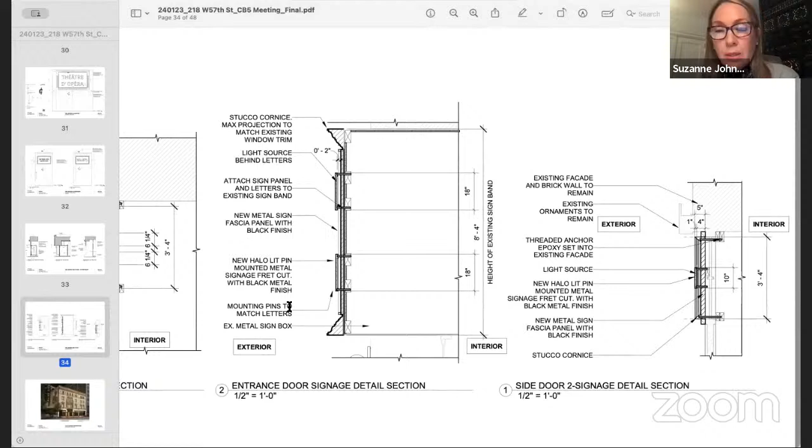That's cool. And all of those signs—the other two signs you mentioned you're adding—will they have that same type of glow, the same kind of lighting? Is that right? Yes. Okay.

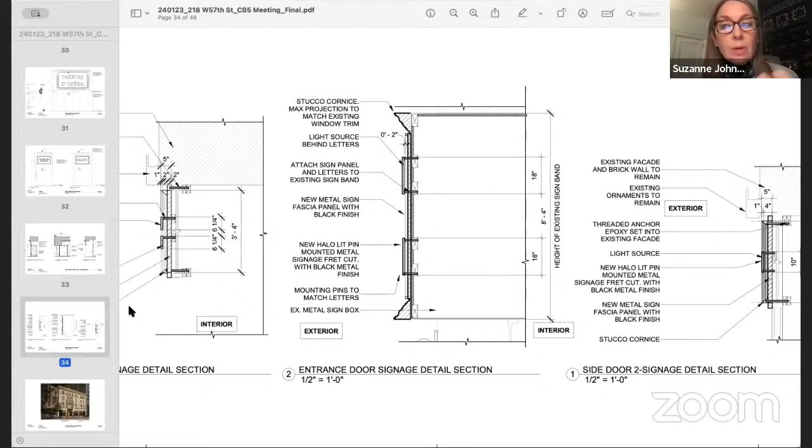And then, is there anything digital going on—anything that's running during a performance? And then the last question is sound: is there some kind of sound happening outside of this to promote it and give it that kind of animation, not just statically?

Can you speak to any of those things? No to both, nobody's told us about either of those things. I certainly don't anticipate there being digital stuff on the outside, and I don't think they're going to have amplified sound at the entrance. Nobody's mentioned it.

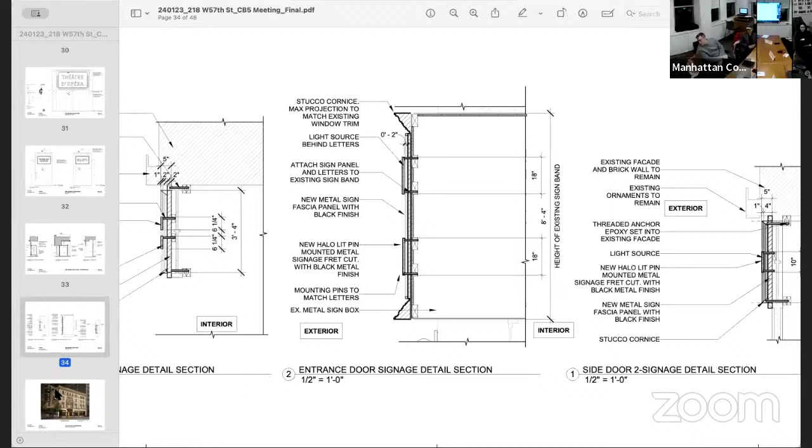I think to add to that, the beauty of the performance is that it is set in the generation consistent with the conception of the building. It's meant to bring you back in time in some sense, so it would be contrary to have anything digital or of the 2025 generation. That's great to hear, it sounds very McKittrick Hotel-like.

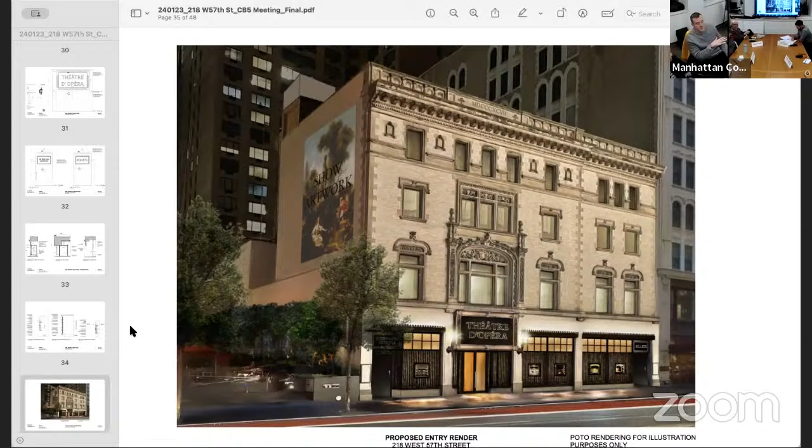Truly, the only thing that gives me a little bit of pause, and I'm not going to vote against it for this reason, but I want to raise it as something I don't particularly care for, which is on the east facade, that pipe railing, which is the only thing you're going to see that's not the building, visible in pairing with the existing primary facade. The fact that it's visible, it could be set back further to minimize that visibility.

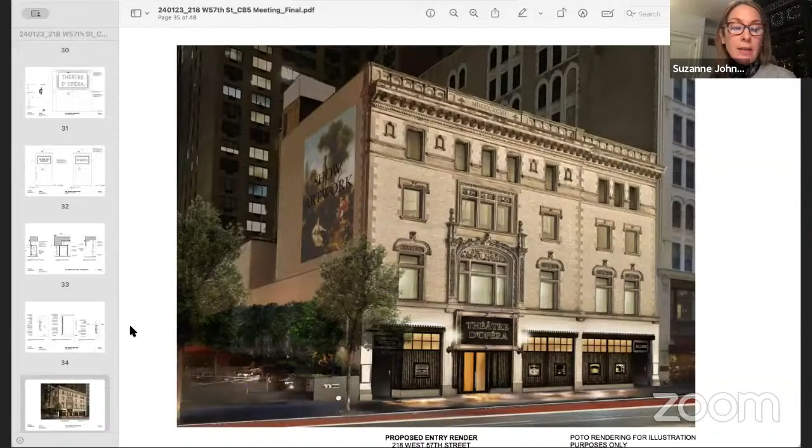And I'm excited about revitalizing this building in the area. Thank you, Suzanne.

Other comments? Yeah, Barbara, I'm in favor of it. I think the visual impact is minimal, and overall it will be great to see this building come back to life. Thank you.

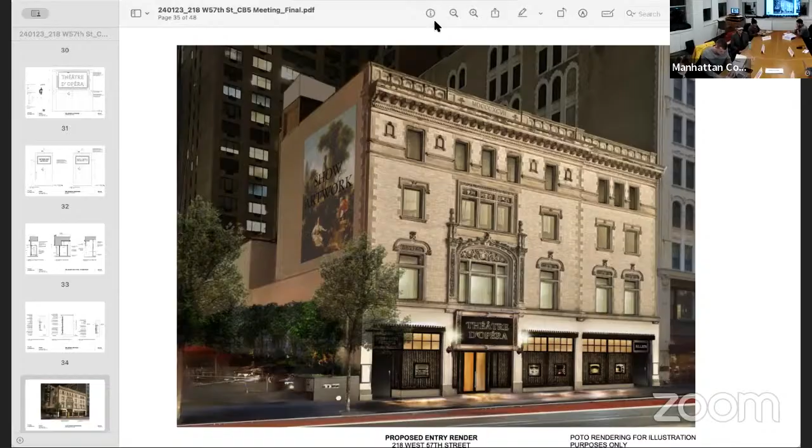Any new business? Zul: I would like to see a visioning meeting sanctioned. Can you speak a little louder, please? Yes, I'd like to see a vision meeting sanctioned by the exec, by the full board, for those people who would like to come voluntarily to talk about their vision of what our district, our borough, our city would look like in the future.

This would be something to bring to the attention of the board office, and maybe you can consider it by the executive committee. It wouldn't be the landmarks committee that could make this determination. So, could it be new business in front of the full board? I would encourage you to actually reach out to the chair of the board and see how it would be best to bring this.